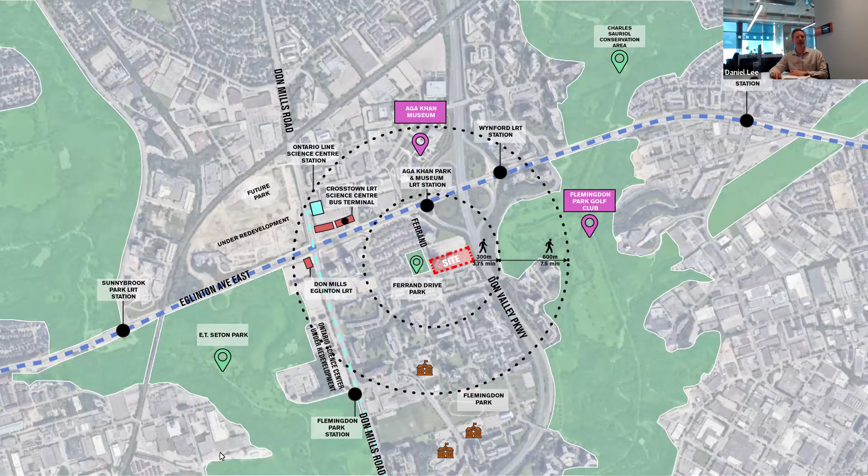So here's an aerial view, a little bit closer in, of the site itself and its lot. The building that we are converting is that 15 or 14-story commercial tower. Now, the remainder of the site actually runs about 200 foot deep back to the boundary of the DVP. The rest of the site contains a 6-story parking structure, and the rest is just a surface parking lot, both of which are obviously underutilized given the occupancy in the building, and also the huge surface parking lot that's right next door.

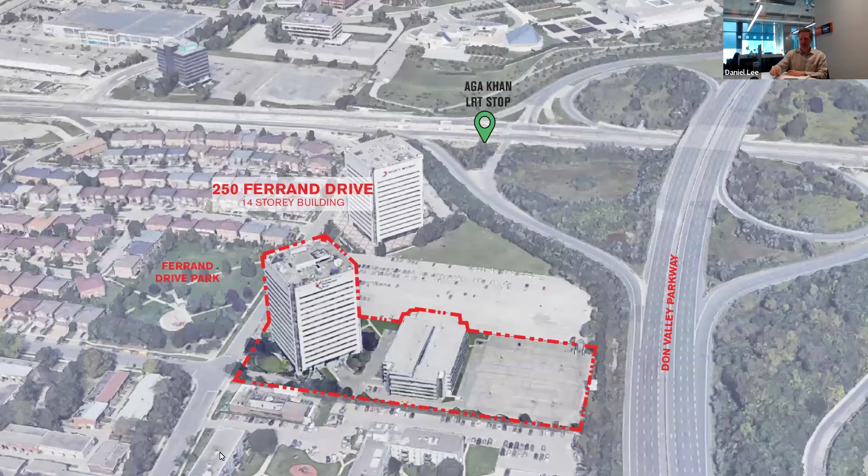So the plan for this project is to split it into 2 phases. The conversion of 250 Ferrand Drive itself is going to be phase 1, and that's what we're working on right now. As part of that application, there is also going to be a rezoning application, a ZBA. We're going to be demolishing the 6-story parking structure, tearing up the surface parking, and sodding all of that phase 2 site in preparation for a future development, which at the moment is undefined. But given the dimensions of that site, it can certainly take one or possibly even two further residential buildings.

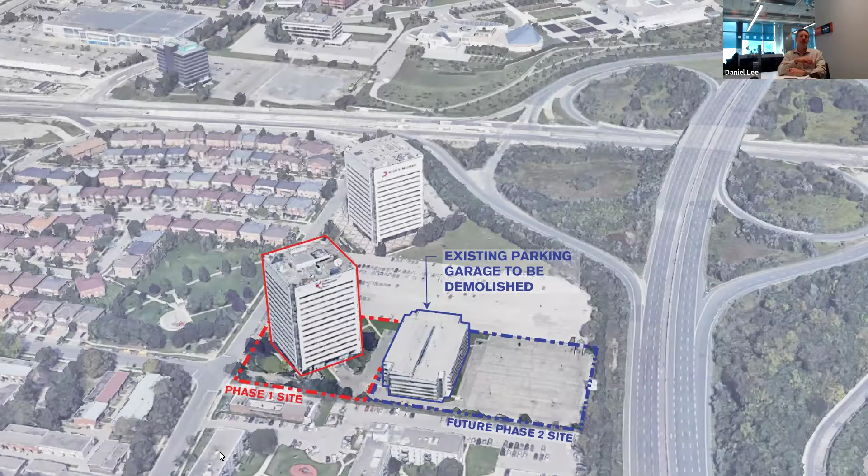So this is another aerial view. Our building, 250 Ferrand, is actually the one in the foreground. The building in the background there with the ICICI Bank signage is 150 Ferrand. And Amexon Developments actually own both of these towers. As I mentioned earlier, 250 Ferrand was less than 50% tenanted, and that's also the case for 150 Ferrand.

So it was a fairly straightforward solution to negotiate with the tenants and move those that wanted to continue renting a space from 250 Ferrand into 150 Ferrand. So the 150 Ferrand building currently is fairly close to 100% occupied now, and 250 Ferrand is on its way to being completely empty and ready for our conversion. So we've consolidated the tenants, basically.

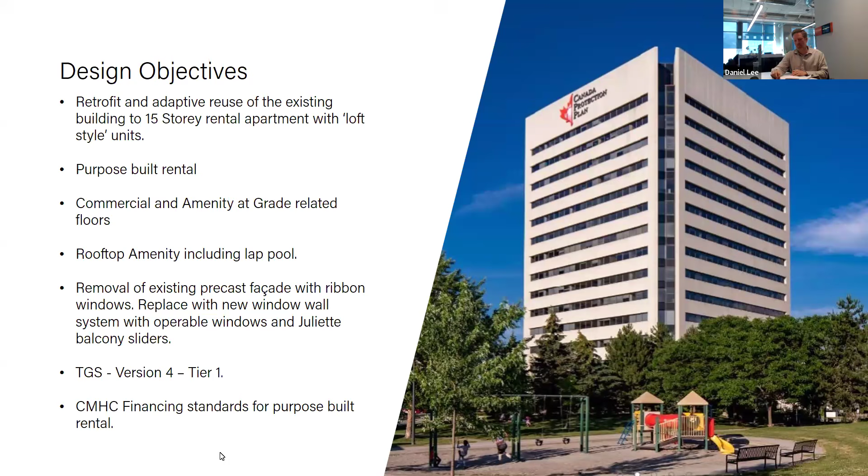But here's just a quick overview of the statistics for the project that we have right now. So we're at about 260,000 square feet within that building of residential. There's also a little bit of commercial space proposed on the ground floor. We have a total of 331 units, and the mix is about 40% one bed and 60% larger units. And you'll see later on in the presentation that it's a result of the dimensions of the building itself. It's quite a deep floor plate.

And so in terms of parking, the existing office building doesn't have any below grade parking. And we didn't want to provide a huge parking lot to meet certain zoning requirements or bylaw requirements. So we're just proposing 29 surface parking spots that are going to be in that phase 1 portion of the site. Once phase 2 is developed, or if phase 2 is developed, it's likely that there will be below grade parking built as part of that new build development. And at that point, they can see whether some of that below grade parking needs to be built and applied to this rental building.

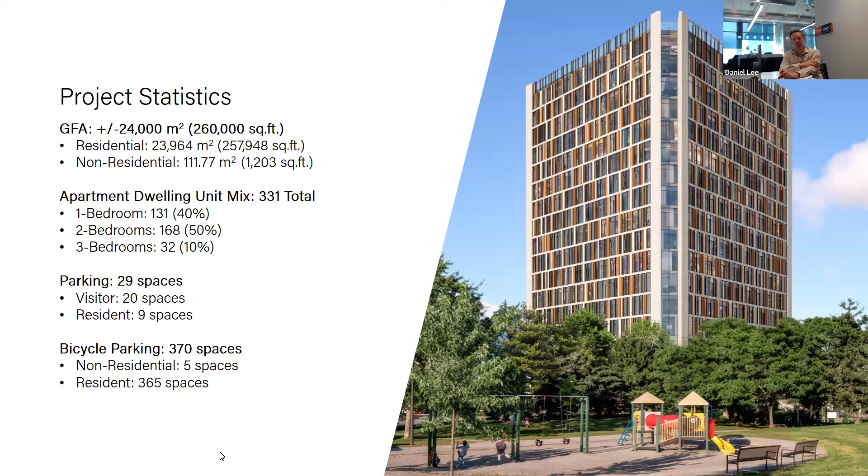But with it being in an MTSA, it's a reasonable assumption to say that people can live in this building and not require a car. And in that same regard, we are providing a number of bicycle spots to meet the Toronto Green Standards and the Toronto zoning bylaws. So that's just a brief overview of the current statistics.

So now we'll look at some of the challenges for this project. And as I mentioned, we're still technically in the ZBA phase of this job. So any of the challenges that we're going to discuss, I'm sure they're not going to be all of the challenges. I'm sure there's going to be a lot more that come up over the next year or so on this project. And so we'll just jump into some of those.

So this image shows one of the current floor plans. This is one of the typical office floors. You can see the partitions and stuff there. As you can see, the floor plate is like 1,600 square meters, which for a residential tower is pretty large. At least if you compare to the City of Toronto's tall building guidelines, it's basically two of those guideline towers stuck together.

And also you might notice that some of those depths are quite big. If you were starting with a new build residential project, you wouldn't typically start with a 17.5 meter dimension from exterior face to the core of the building. You see the core there, there's existing elevators, there's a scissor stair, there's various other services and washrooms in the center.

And then there's an open plan structural grid, column grid. And so that column grid is obviously a good opportunity because there aren't shear walls or other structural walls to deal with. It's a nice open and adaptable space. But obviously some of those deep dimensions are going to be a bit of a challenge.

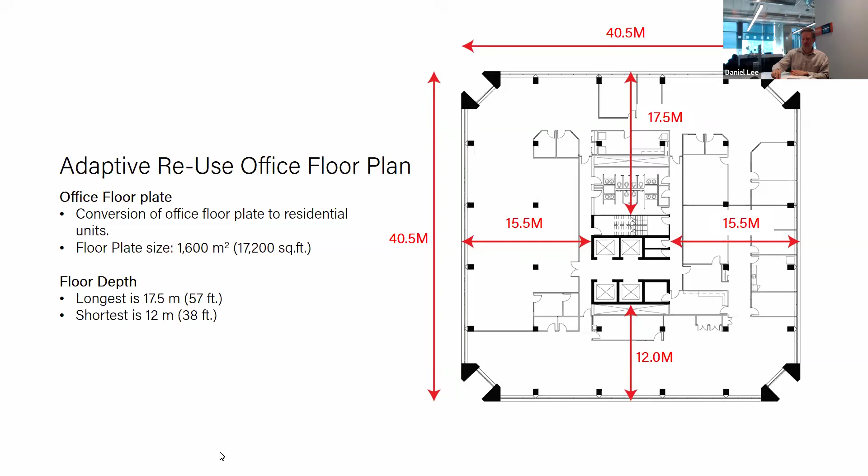Another challenge, this is probably more of an opportunity than a challenge: the floor to ceiling heights. So the floor to ceiling heights in this building are fairly generous when compared to typical new build residential. Obviously in residential, you build like a 3 meter floor to floor or 2.95. With this building, we basically have 12 foot, like 3.7 meters, for a typical floor. And then you can see some other conditions there for some of the non-typical floors.

We've got a 6.1 meter ground floor space and a 6.7 meter double height space at the top of the building. So with the ground floor, I'll show you later on, we're thinking about adding some kind of split level mezzanine type spaces into some of the ground floor units. And for that upper double height space at 6.7, we're actually thinking about adding an additional floor there. So this building will go from being 14-story to 15-story.

And I should say, those 12-foot high floor to floors are also going to help us counteract some of those deep units that we probably will end up with based on that 17-meter dimension to the exterior face.

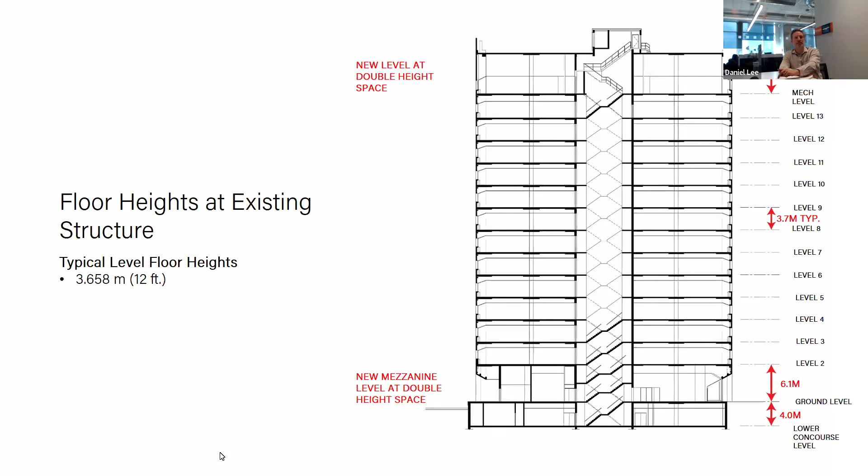This project is definitely on the other side there. It's more adaptable, and the workflow is more agile. We have a very fixed timeline already for the project, same for the cost, and we're basically working very flexibly in terms of defining the scope in some cases as we go along, and as work proceeds.

So now we'll just move on to some of the solutions, or current solutions, should I say, based on the phase we're in right now with the project. So we'll just take a look at the building services first. So we have obviously a lot of floor depth. And we also have a bunch of existing services that would be a good idea to maintain in their locations.

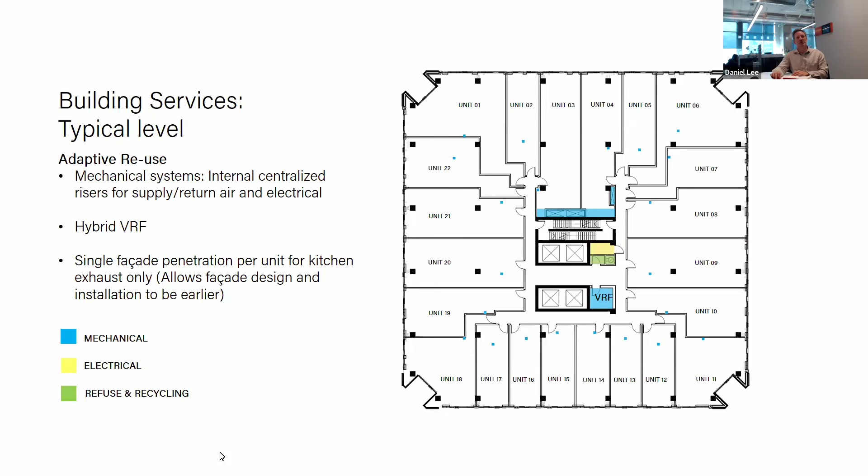So this is just another plan that shows higher up. So that central area, you see that blue area has grown, and that's because of some of the duct transfers. And also, when we get to level 14 and 15 of this building, that space is going to expand, and it's going to house some of the other mechanical equipment, such as boilers, which means we'll have less equipment at the roof, which we're going to use for outdoor amenity with the pool and an indoor amenity space also. So we're using some of that additional floor depth to squeeze in as many of the services as we can in an efficient manner.

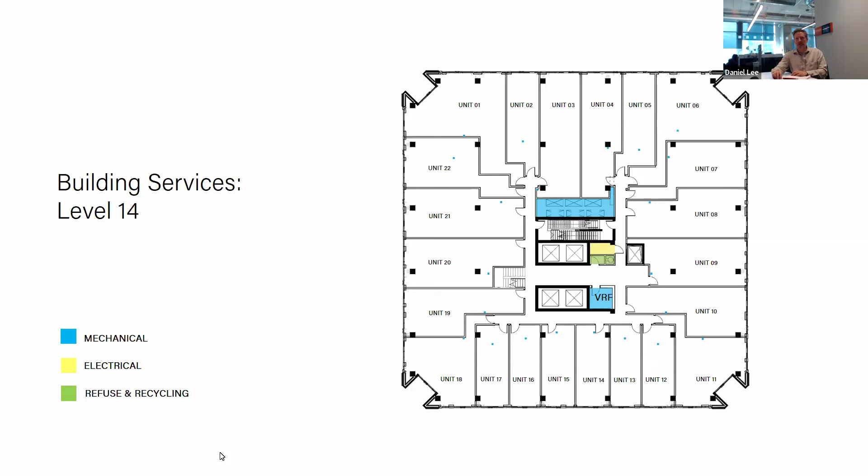This is the lower concourse level. You can see the colored boxes there, the yellow and the blue. So these are existing rooms. The existing building has a hydro transformer vault and an electrical room, existing pump room, and we plan on just maintaining that equipment as much as we can and reusing those spaces.

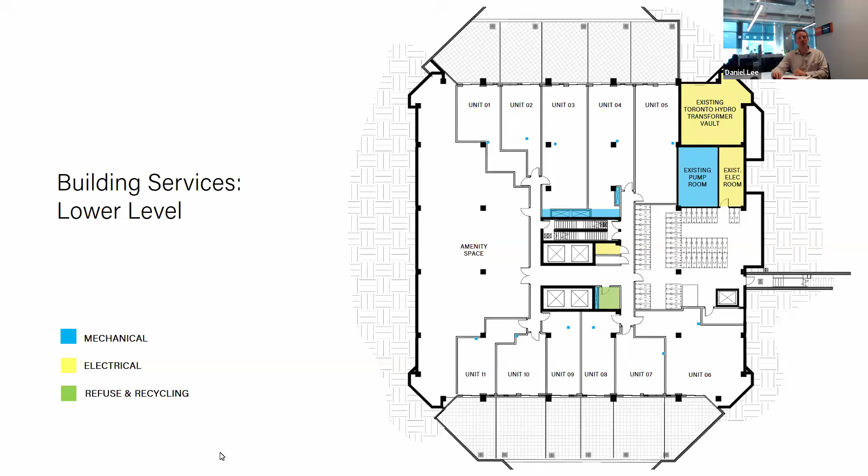Just a quick note about that hybrid VRF system. So the image there on the bottom is an office layout, but essentially it can work the same for residential purposes. The good thing about the hybrid VRF is that the amount of chemical coolant and refrigerant is only about 20%. That green line that runs from the unit to those transfer boxes is the only refrigerant. And then the next 80% is actually just hot water and cold water.

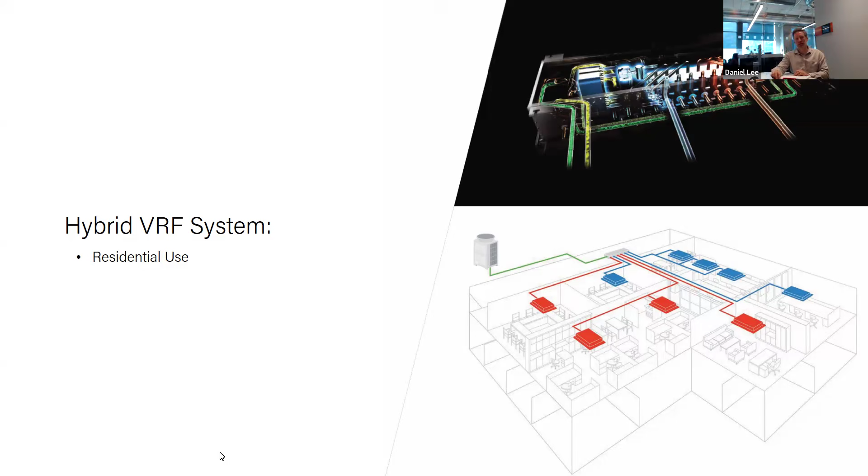So what comes out and travels from that point, which would be in those VRF rooms, to the suites themselves is just going to be plumbing. It's just plumbing water lines basically, and with it being variable, it's controlled by the unit. So it's a very energy efficient system, and the hybrid version with the water is a lot cleaner as well. None of the coolant gets anywhere near any of the residential suites.

And what we're trying to achieve is more light penetration. As we have quite a deep floor plate, we want to get as much light as we can to the back of those suites. And I'll show you some of the suites later on.

So if we just look at some of the typical floors first, I should say the suite layouts are actually not by Core Architects. 2x4 is the interior designer for this project, and they're working with Amex on the suite layouts themselves, and we're coordinating on the demising right now.

What we have are some fairly longer and narrow suites with some buried bedrooms. And that's why we want that maximum light penetration to allow light into the back of those suites. You can see from one of these earlier renderings there that we're trying to celebrate the fact that it's a conversion rather than hide the fact. So these are sort of loft style units where you're going to see exposed ceilings and things like that. We're not trying to hide the fact that we're dealing with some existing conditions there.

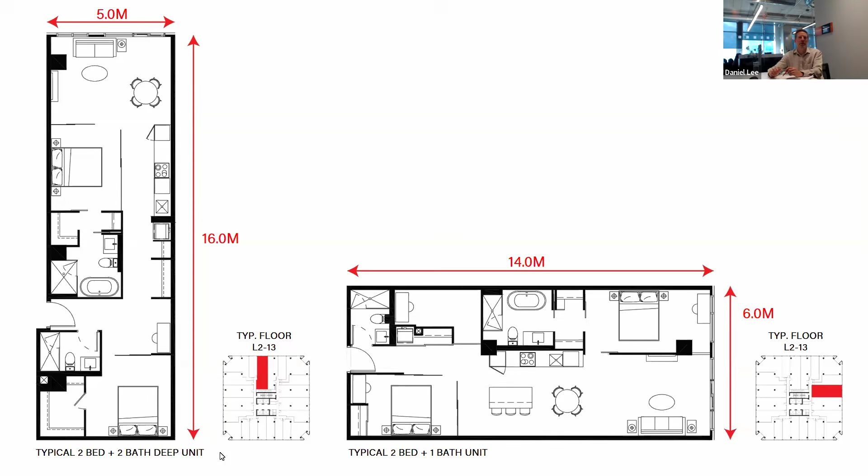On the other side, where there's not quite as much depth, there's a 14-meter depth. Decision was taken, well, let's make these units a little bit wider. You still get the proportions that are going to allow for more frontage. So we have a 6-meter frontage, which allows for a bedroom and a living space up front. And then in some cases, we also have a buried bedroom further back, like you can see there.

This is also on the typical floors. There's a corner unit, so a different condition in the corners. Obviously, you can use the corner for bedrooms as well, because you have more surface area of glazing. We use those inset corners to create a nice lounge space and a living area. And then we have the bedrooms off to the sides. And there's a smaller unit, a typical 1-bed unit on the other side of the page. Those we've also made fairly narrow so that we can get a buried bedroom into there.

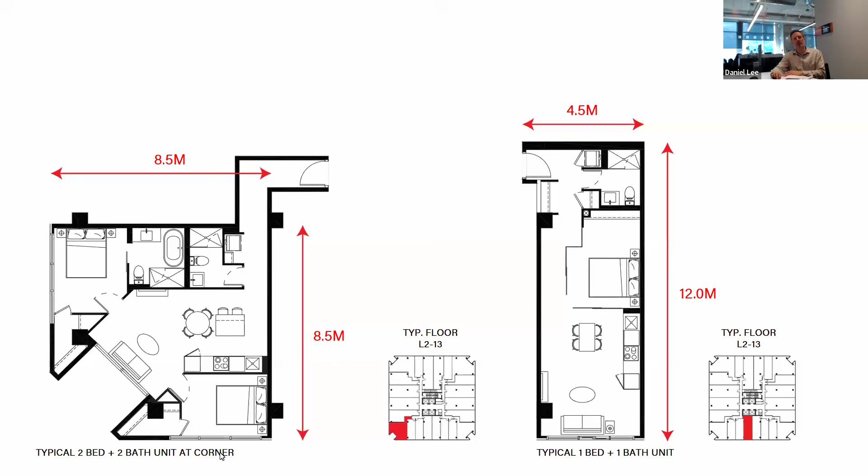So then we'll look at some of those non-typical floors. As I was saying, with the ground floor, we're considering putting a mezzanine in. I'll just show you the section of that. So we're using that 6.0 floor to floor height to get an extra space in. With these units, we're going to set back that mezzanine space about 7 meters from the exterior glazing. And then you're going to have a really nice double height space up against the facade, and that's going to be where the living space is. And then further back in the suite, we'll have a bedroom at that upper mezzanine, and then bedroom and living at the main space at the ground floor.

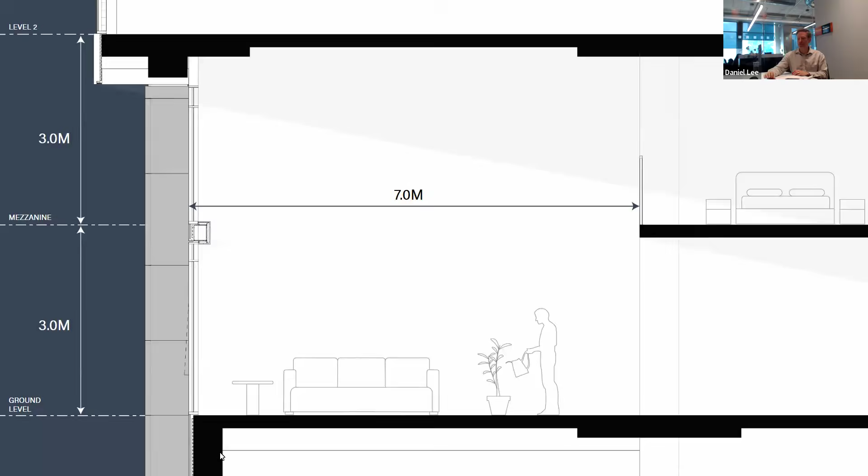So we'll take a look at a unit layout for that. So that's one of those unit layouts from 2x4. See the living space up front, the staircase that leads up to that mezzanine space. And there's a bedroom tucked underneath that mezzanine with a washroom and a den. And at that upper space, which should be really nice, is a bedroom. It has its own living space. It has its own bathroom and walk-in closet and stuff. So good utilization of that additional height.

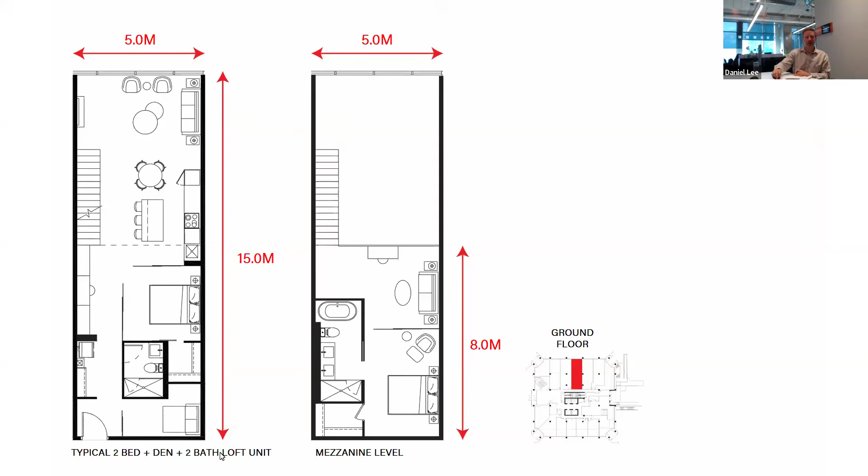And likewise for that upper floor. So this is the level 14 that had that mechanical mezzanine space in. And so the decision for this space, as we have 6.7 meters, was to actually add a completely new floor. That mechanical mezzanine that's there right now, which takes up about a third of that floor, we're going to take out all the mechanical from that space, and then we're going to expand that slab so it covers the entire floor. So we're using that datum line to set the new floor slab.

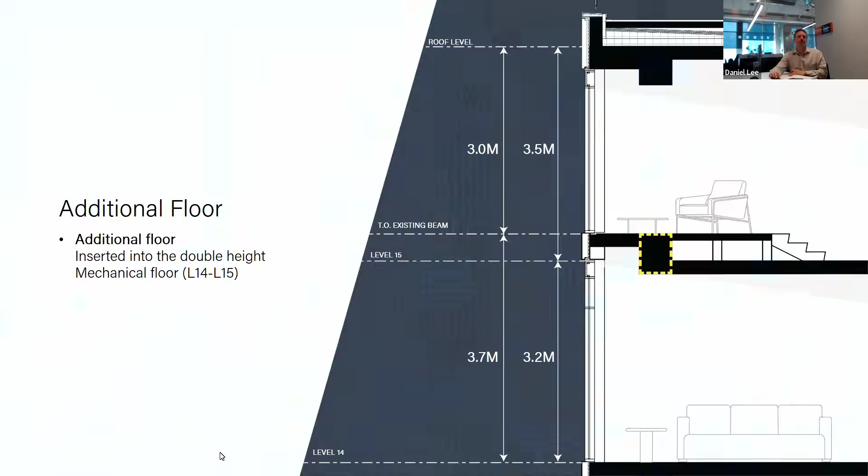So in this project, the decision was taken, in order to avoid some of those extra deep units, to actually pull in the facade. So the facade is actually set back about 1.7 meters from the slab edge and the existing columns. And then they've used that extra depth on the outside to create these balconies. There's obviously some benefits from a design perspective in doing this, but there's also some drawbacks in terms of sustainability, because it's an existing slab extending out there that doesn't have any breaks in it. There's no thermal breaks. So there's some things to think about in terms of cold bridges and things like that. So it's a different design solution, but both of them have their challenges, should I say.

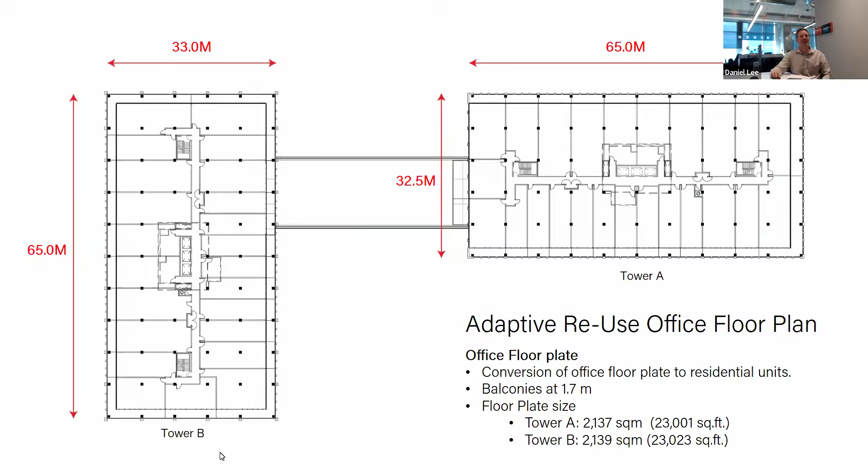But those processes, they're not the quickest. And in this case, we have an existing building and we have a client who's fully committed to the project. And so we've been looking at what we can do from an office to office perspective within what's allowed, in terms of approvals, to start some of the work up front. So as the tenants have been moving out, we've been applying for interior alteration permits on the basis of it still being office space, so that we can clear out all of the interior partitions, take out the suspended ceilings, and return those spaces to a base building condition, which is going to speed up the construction process for the residential once that happens. So that's one solution to get things moving quicker.

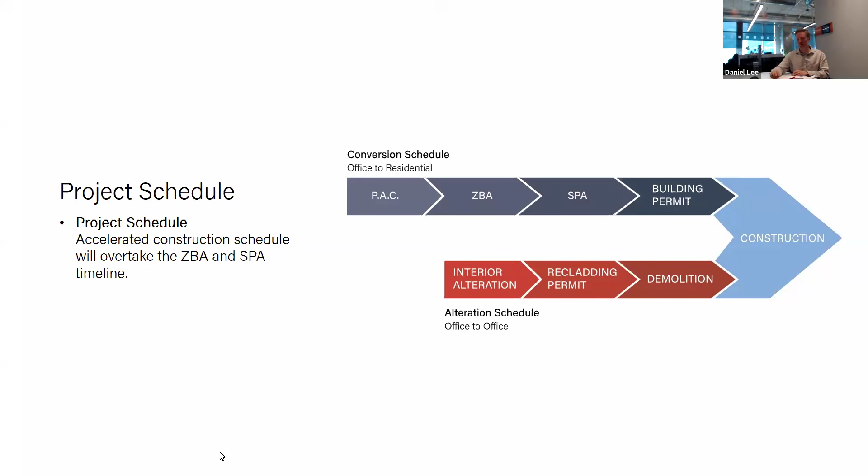So we'll just move on to some of the sustainability items for this project, some of the measures and the factors that we're introducing. So achieving sustainability goals. As I mentioned earlier, we're going to have an H-VRF system for this building. We're also going to be using some solar panels on the facade, and I'll talk about some of that in the next slide. We're going to be improving the insulation and the seals. Obviously, the existing precast, pretty old, wasn't very well insulated, wasn't sealed great. Same for the roof. There's not a lot of insulation on the roof. We're going to redo all of that and make sure everything's tight and insulated properly.

We're not going to put any new balconies or anything on this. We're not insetting. We're going to enclose it fully. And that's obviously a benefit from an energy efficiency standpoint. Same for the ratio of vision glass. Even though we're trying to maximize the light penetration, we're going full height glazing on those residential floors, we are actually still hitting a 60-40 split: 60 for solid, 40 for vision glass. The solid in this case being metal panel, spandrel panels, some of the existing precast, and these solar panels. So obviously that 60-40 ratio is kind of a benchmark that you want to hit.

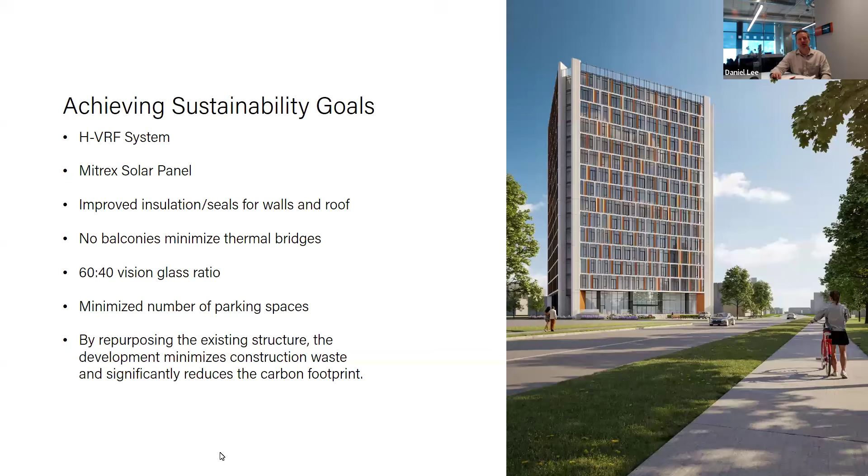So we're still doing that by keeping the tall vision glass in the right areas and making as much of the solid in the areas where we don't need that vision glass. We have the minimized number of parking spaces that we talked about, and obviously the biggest factor here is probably the repurposing of the existing structure and the fact that this significantly reduces the carbon footprint of the project in general.